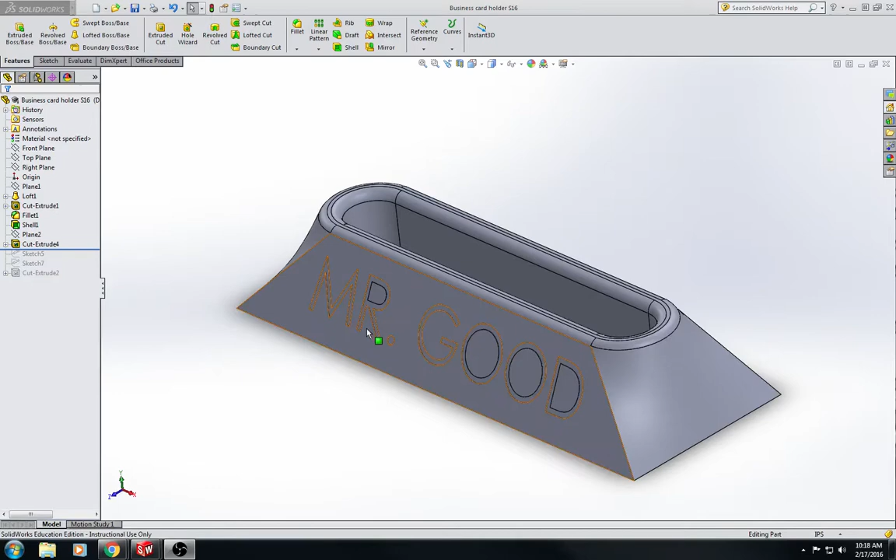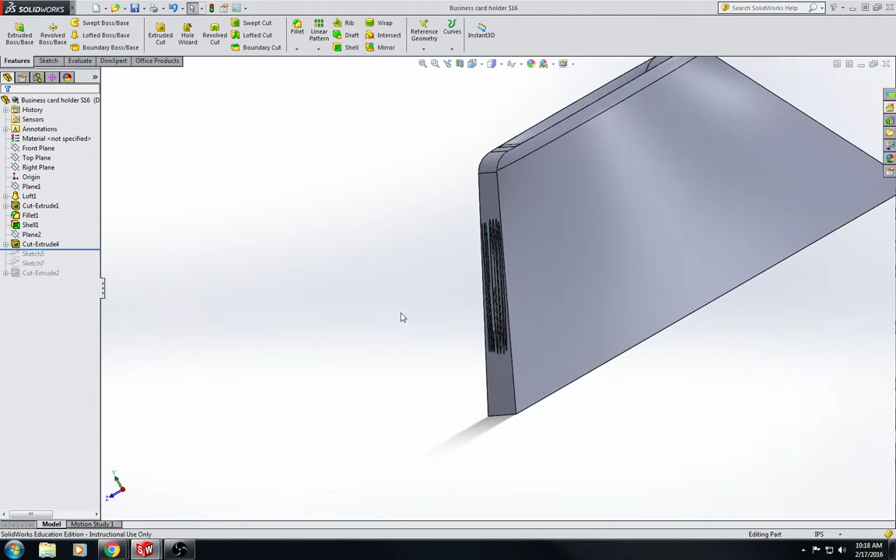It's extrude cut in just a 32nd of an inch, and we wouldn't want to extrude cut it in anymore because then it would start having some issues with adding some support material that we wouldn't want to be in there. So alright, let's go ahead and we'll get started.

So I'm going to go up to File, New, and we're going to make sure that we are in ANSI. So go ahead and go up to Options, Document Properties, make sure it says ANSI, not JIS or ISO. Click OK, and then also down here at the bottom we want to make sure that we're using IPS and not MMGS. So we want to be in inches, pounds, and seconds.

To get started on this business card holder, what we're going to do is we're going to draw a rectangle in the top plane, and we are going to then create a new plane, reference geometry, based off the top plane, about an inch up, and then we're going to draw a slot. So let's go ahead and get started on that.

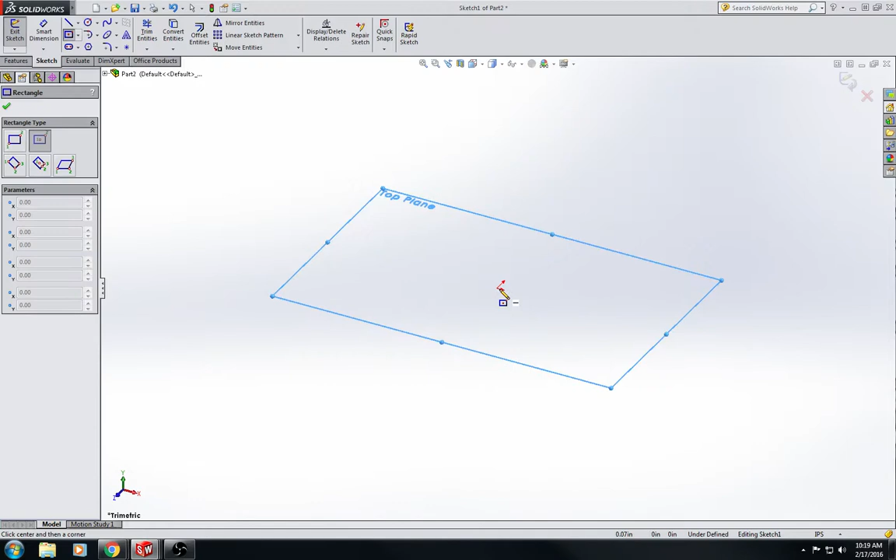So we'll go to Sketch tab, Center Rectangle, select the top plane, we'll draw out our rectangle, Smart Dimension, 3.5 and 2. Hit the purple arrow to exit the sketch. We're not going to attach a feature to the sketch yet, so there's no feature going on right now. I just exited the sketch.

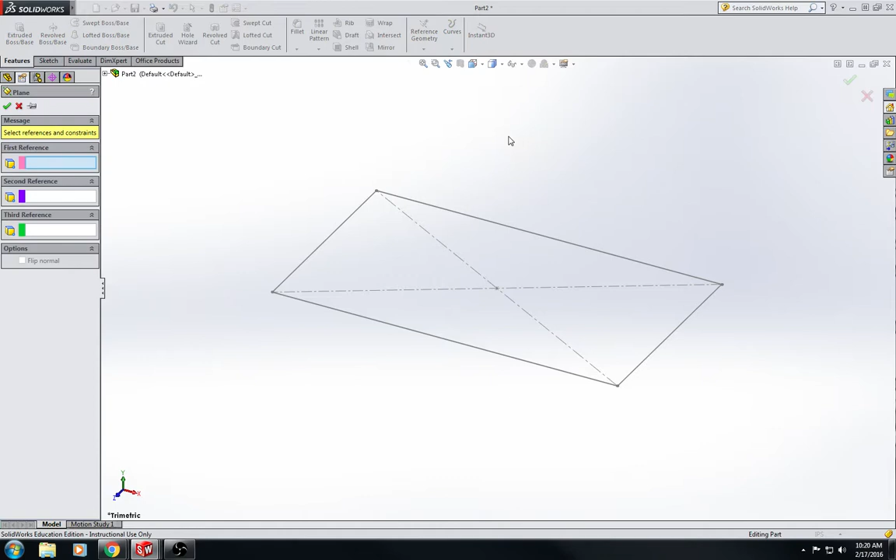Okay. Now I'm going to do another sketch, but I need to do this sketch on a reference plane which we haven't created yet. So we're going to go to Features tab, Reference Geometry, Plane, and for our first reference we're going to click this drop down and select the top plane. We want to offset that top plane 1 inch. Now you can see there's another plane on top of this top plane, offset 1 inch. We'll click the green check mark.

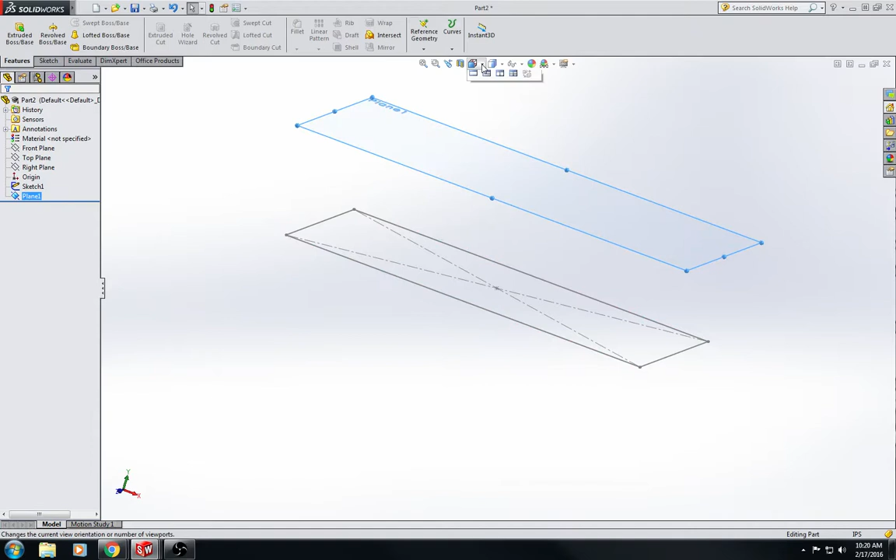Now a plane is infinite, so it doesn't matter how big or how small this is. A plane continues forever. So the size of the plane does not matter. You could actually even have the plane all the way over here, and you would still be drawing on the plane. Just to prove that point, I guess I'll just leave it over there. But it really wouldn't matter if it covered the whole thing or not.

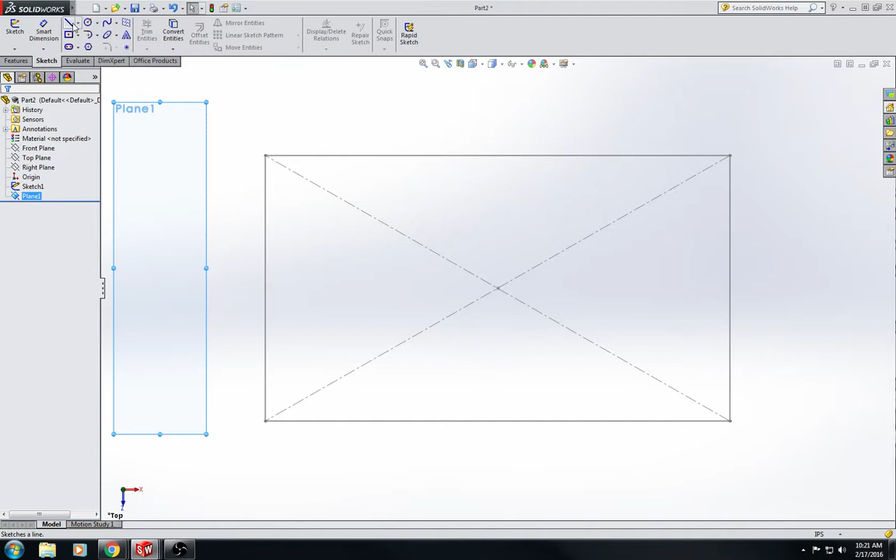So I'm going to go to Sketch tab, and I am going to use my line tool, and you need to make sure that plane 1 is selected before you select the line tool. Otherwise it's going to ask you what plane you want to draw on, and then you'll just select plane 1. But I already had it selected. Then I'm going to hold down the left mouse button, drag to the right, release the left mouse button. Going to move down, hold down the left mouse button, release the left mouse button.

I'm going to hit escape to exit the line tool. I'm going to hold down the shift key and select both lines. Now we want these lines to be equal, and the best way to do that is using the equal geometric relation. So I'm going to select that equal geometric relation, and we want to add one more geometric relation to these lines, and we want to have the endpoints be vertical from each other.

So as you can see, they're not necessarily vertical from each other. Even if you drew them so they appear vertical, they're not necessarily vertical. So by holding shift and selecting two of the endpoints that are supposed to be above each other and inserting a vertical relation, they now line up.

You don't need to do that to the other side because the lines are equal. So if the lines are equal and these two endpoints are on top of each other, then that means that these two must also be on top of each other. You can see that if I drag one, the other one follows along with it.

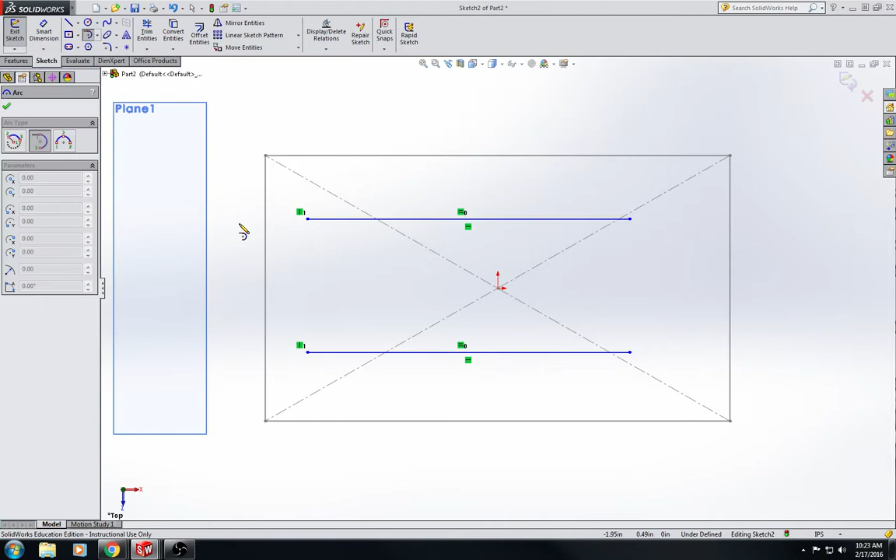Okay, now I'm going to do a tangent arc, and I'm going to select one endpoint and the endpoint below it. I am going to do the same thing over here, and if your arc is doing what mine is doing, just swing it around until it goes where you need it to go.

Then I'm going to do a center line from one corner to the other. And what I'm going to use this center line for is I'm going to snap the midpoint of this center line to the origin.

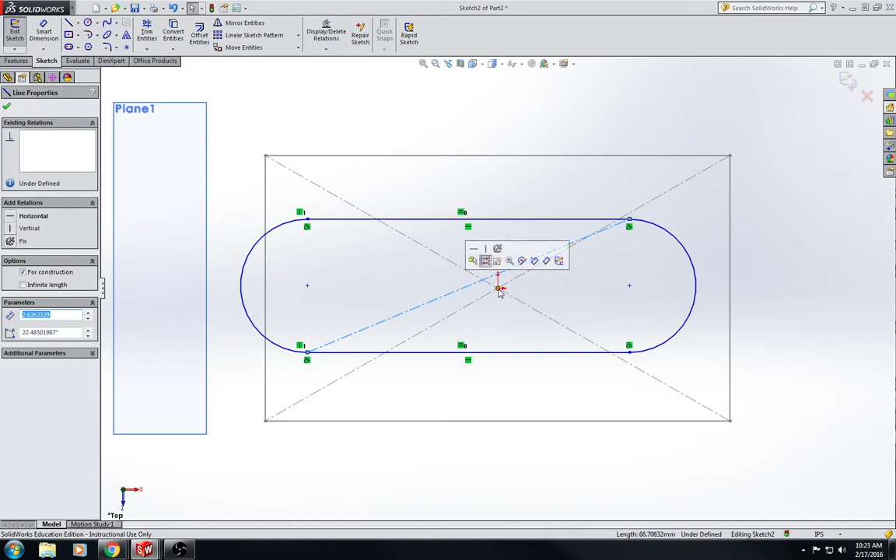Now, if for some reason you can't select the origin, you're probably not in the top view. So if you're slightly crooked, you see you can't select the origin. So you need to be perfectly in the top view, and then you'll be able to select the origin.

So I have this line selected. I'm going to hold shift, I'm going to select the origin, and I'm going to set a midpoint relation. And you'll see now that the origin is snapped directly halfway between both endpoints, right on our center line's midpoint.

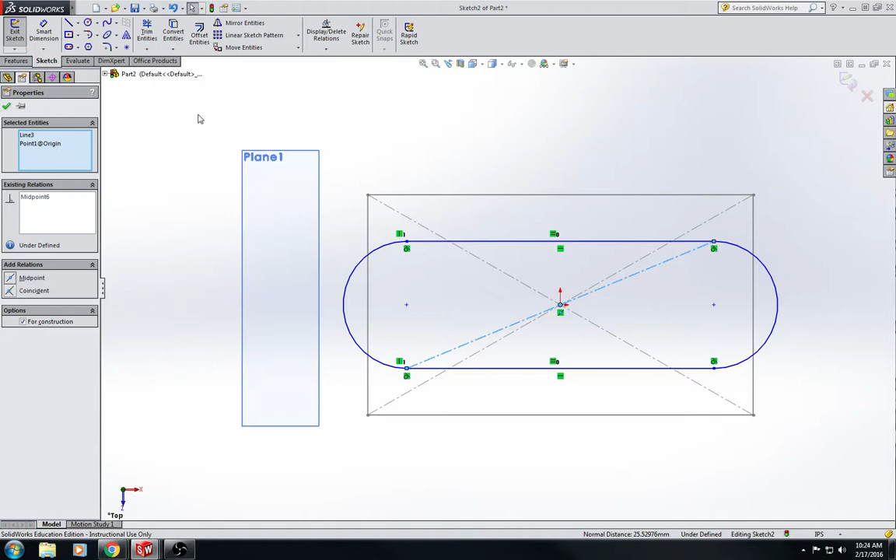I'm going to go to Smart Dimension, and I am going to set the distance between our top and bottom line to 1 inch. Going to select the top, and I'm going to set this to 3.5. And I think I must have messed up the sketch size here in this first one, so that's fine. We'll go back and change it.

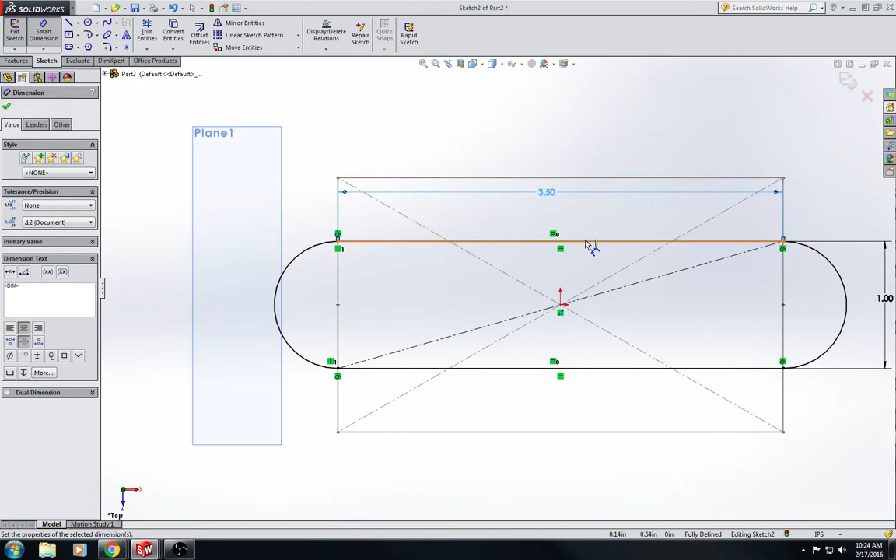Alright, so I'm going to go ahead and approve that sketch, but as you can see, this doesn't look quite right. I must have put in the wrong dimension here. So I'm going to go over to Sketch 1, right click, and I'm going to Edit Sketch. And this is supposed to be 5.5, not 3.5. There we go. Okay, now that looks good.

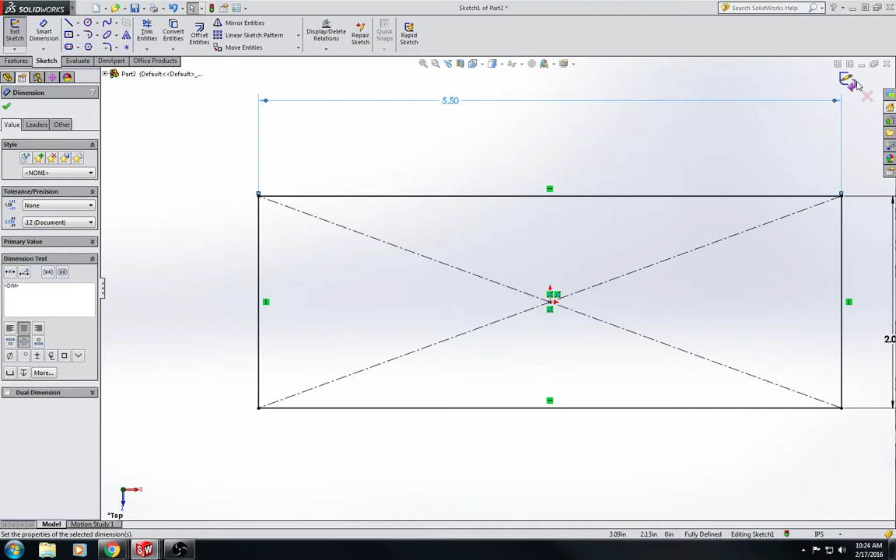Okay, now plane 1 is just in our way, so we don't want it anymore. We're just going to hide it. We're not deleting it, we're just hiding it so you can't see it. So just right click on it, select these glasses, and it'll disappear. It's still there, you just can't see it.

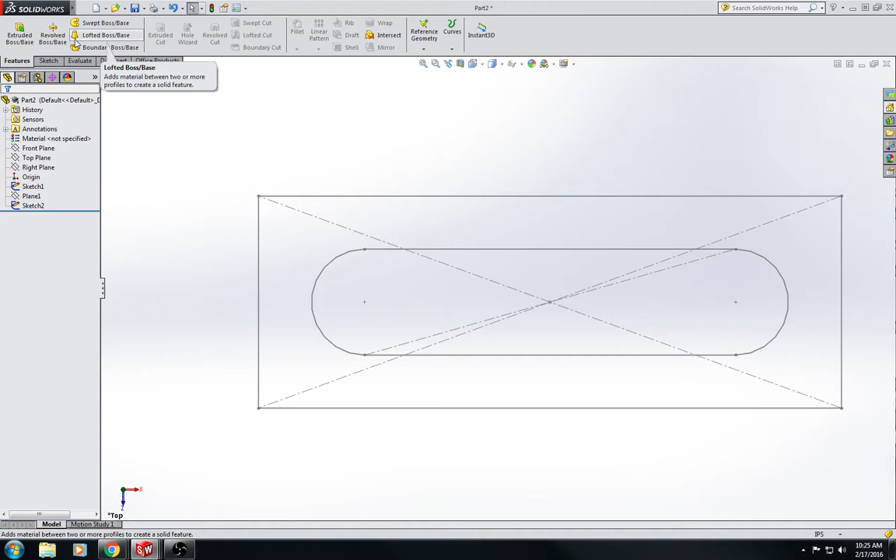The next thing we're going to do is we are going to use the feature Lofted Boss/Base. Now this is a new feature that you guys haven't used before. What the Lofted Boss/Base does, as you can see in the little diagram next to it, is it creates a solid part or a solid feature between two sketches. So I'm going to select that. It wants to know what my profiles are. So I'm going to click my drop down list, select sketch 1, select sketch 2.

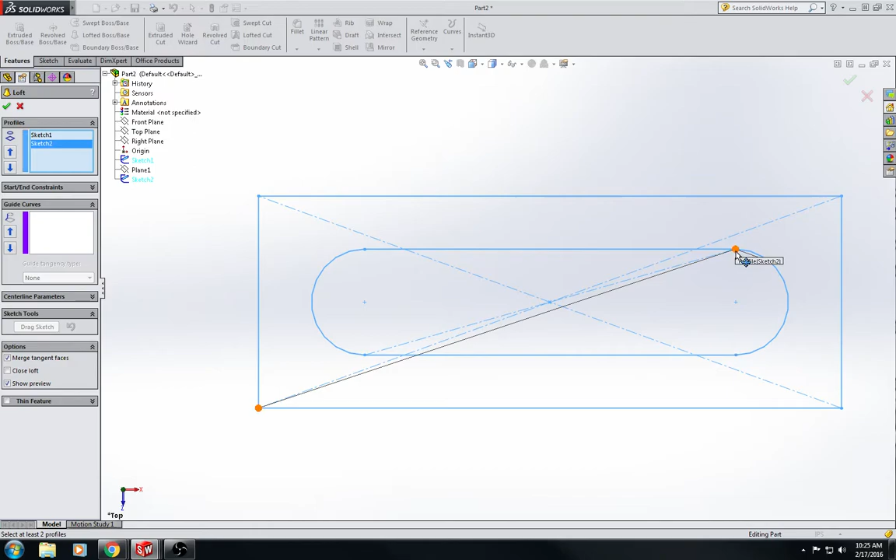And then you can see these dots here. These dots need to line up, and what I mean by that is they should be as close to each other as possible. Otherwise you might get some really funky looking shapes like that, and that's not going to work for us. So what we need to do is drag this other one to the other corner, and there we go. That is what we want.

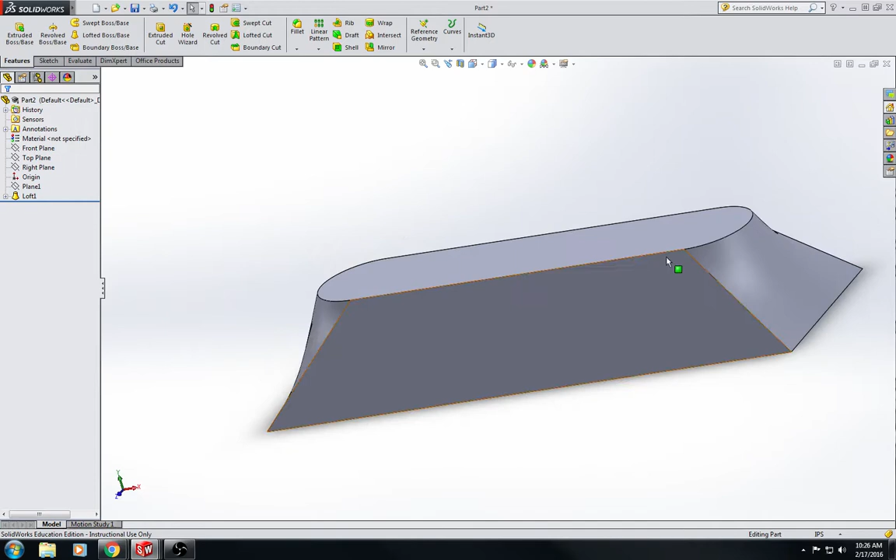Green check mark, and there's our loft. Sometimes if you're having trouble putting those dots where they need to go, change the angle that you're looking at the part, and then sometimes that'll allow you to put the dots or the grips where they need to go.

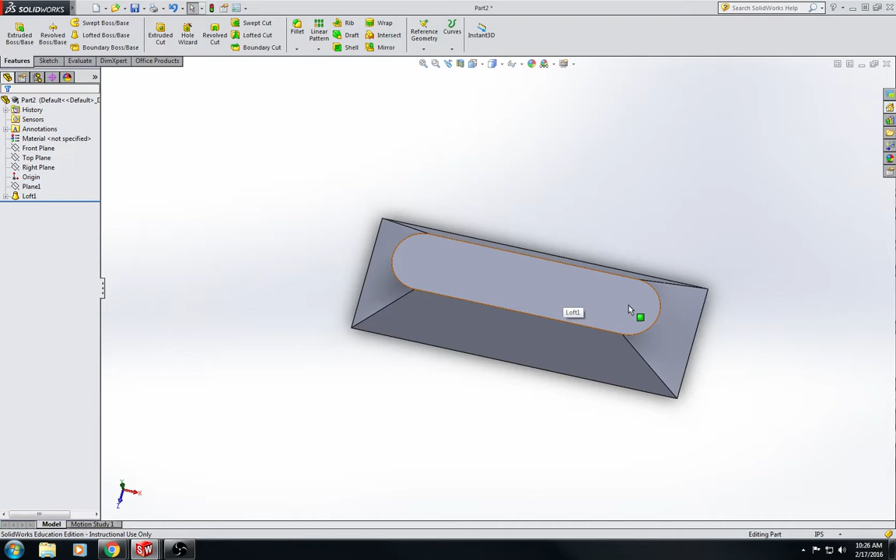Okay, so the next thing we're going to do is an extrude cut. This extrude cut is going to be right here, that's where the business cards will go. The extrude cut, we'll actually not have to draw it, we'll just offset this existing contour here.

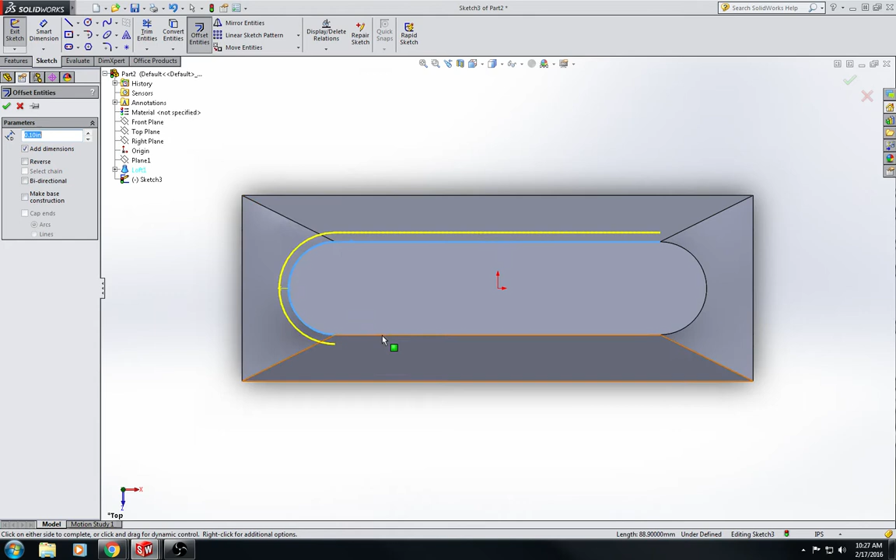So I'm going to go extruded cut. I'm going to select this top surface. I'm going to go to offset entities, and select these existing contours. Whoops. There we go. Okay, now I should have been able to do that in just one, but I accidentally clicked on the inside, which then set it to where it needs to be.

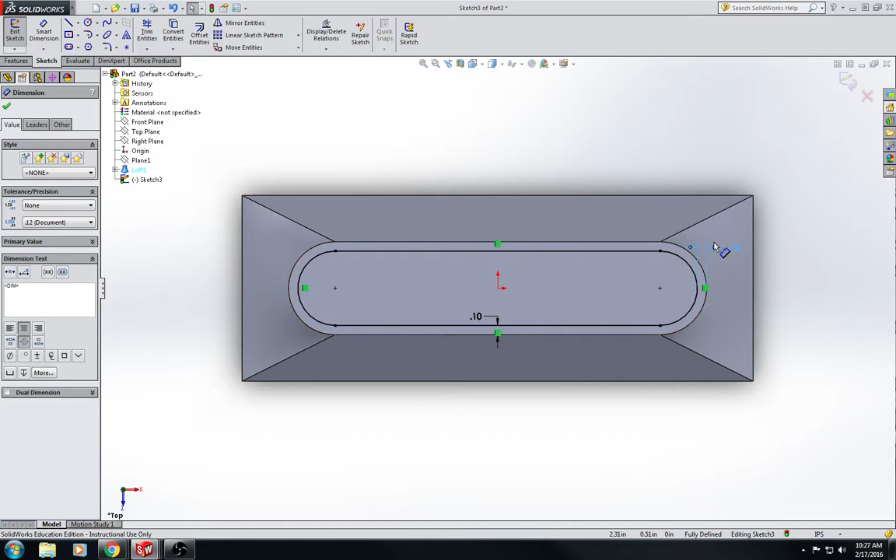We want these to be... I think it's 0.2, but let me make sure. I'm looking in the book here. Yeah, 0.2. So these should be 0.2.

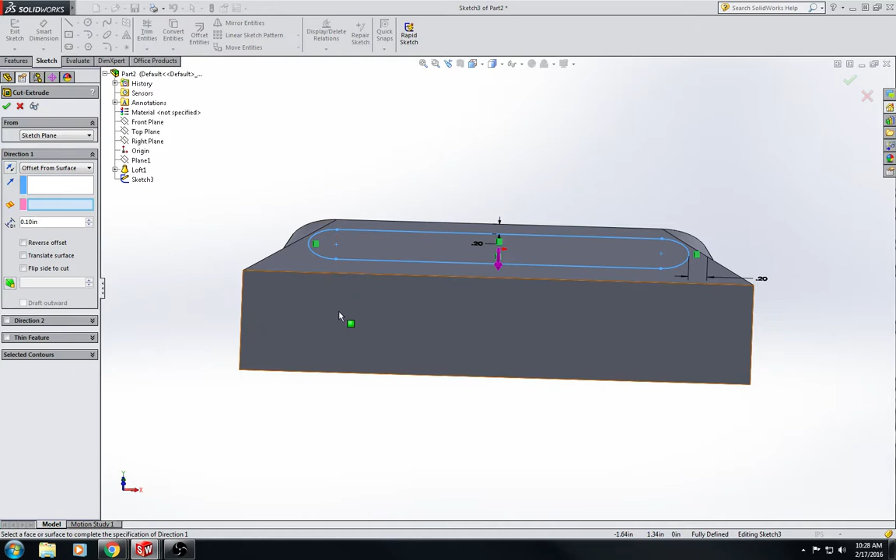Okay, there we go. Purple arrow, so we're fully defined, and we are going to extrude cut this all the way to the bottom almost. So we're going to do offset from surface. The surface we want to select, the face or plane, is this bottom one, and we are going to extrude cut that. This is different than what it says in the book.

We're going to put 0.06. Okay, and why we're doing it different than what the book says is because later we're going to go in and shell this out, and we're going to have this shelled out in the bottom, which means we're going to remove all this material in here.

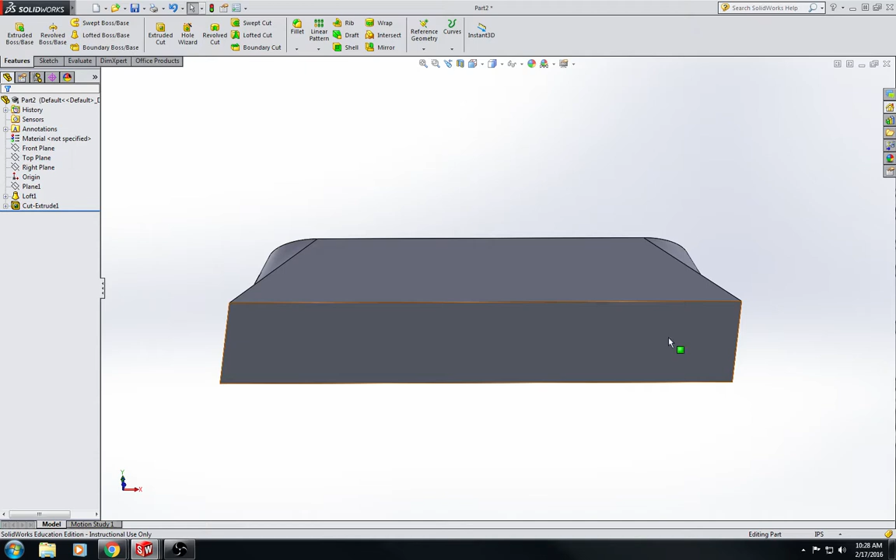But when we go to 3D print it, if we have it the way the book says, then the bottom of this is going to have support material on it. We don't necessarily want it to have support material on it, because if we set support material there, then it might potentially put support material in our name.

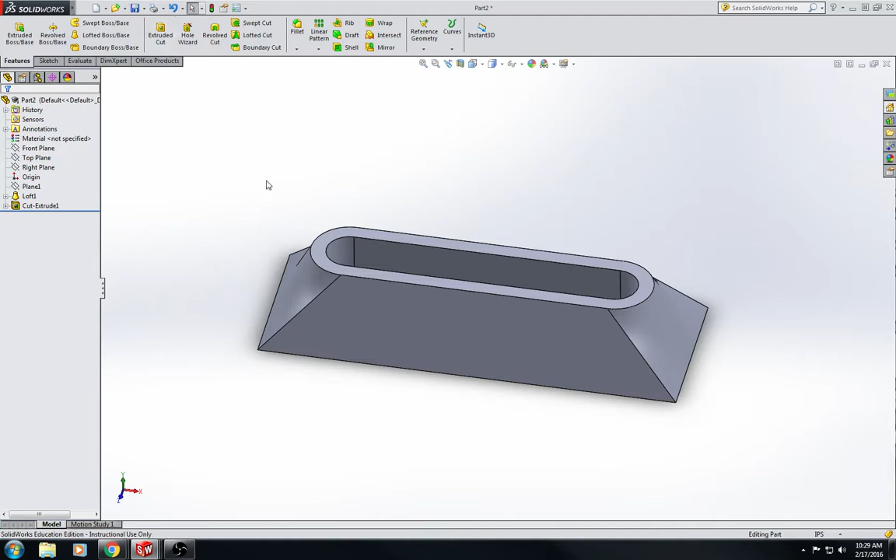So if we just drop this extrude down slightly deeper than what the book says, it'll make contact with the bottom of the build bed in the 3D printer, and that way it won't need support material, and we can avoid having support material in our name when we don't really need it, but it might put it in anyway. So the next thing we're going to do is we're going to add a fillet.

We're going to add this fillet, but the thing about this fillet is we're going to end up having to sort of go back and change the order of where we put it in here, but we're doing this for a purpose, so that we can shell it out. So that's what the fillet's going to look like there.

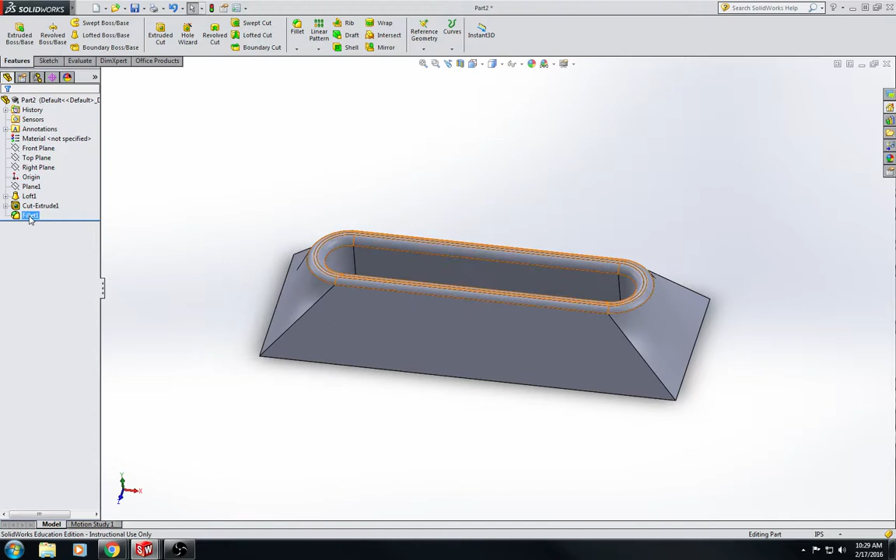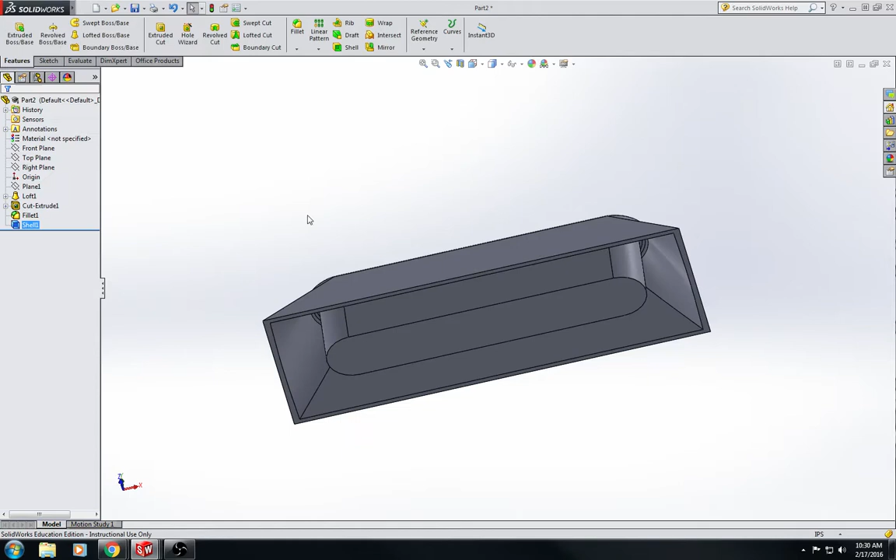So what we're going to do is we're going to do a shell. There it is, shell. I'm going to select this bottom face, and we're going to set our parameters to 0.06. So that's going to set the thickness of our shell to 0.06. Okay, so you can see on the inside there what that shell does to our part.

Now I'm going to do a section view here so you guys can see what this looks like. Now you can see, since we had this filleted already, it shelled to the fillet. Okay, so we would have a nice rounded curve there.

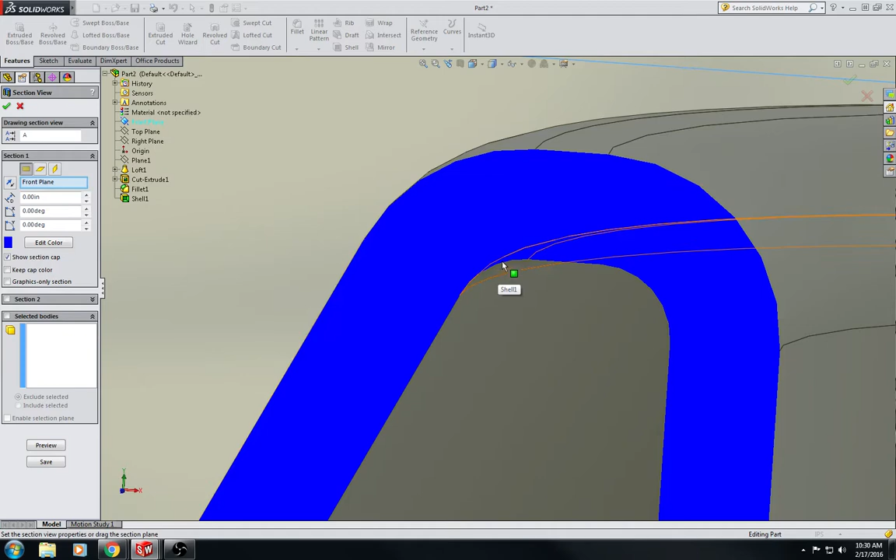However, if we did the shell first and then we did the fillet, so if we reorder these, then you'll see what happens is, so this is saying okay, we shelled it, and now we're going to do the fillet up here. Well, what happens is it fillets the outside, but it doesn't fillet the inside. So then you have a weak point here where it could potentially snap easily.

So what we want is to do it in the order that we did it, but I'm just illustrating for you what would happen if you did it backwards, if you did the shell first. And it is also, I wanted to show you guys how you can reorder certain features.

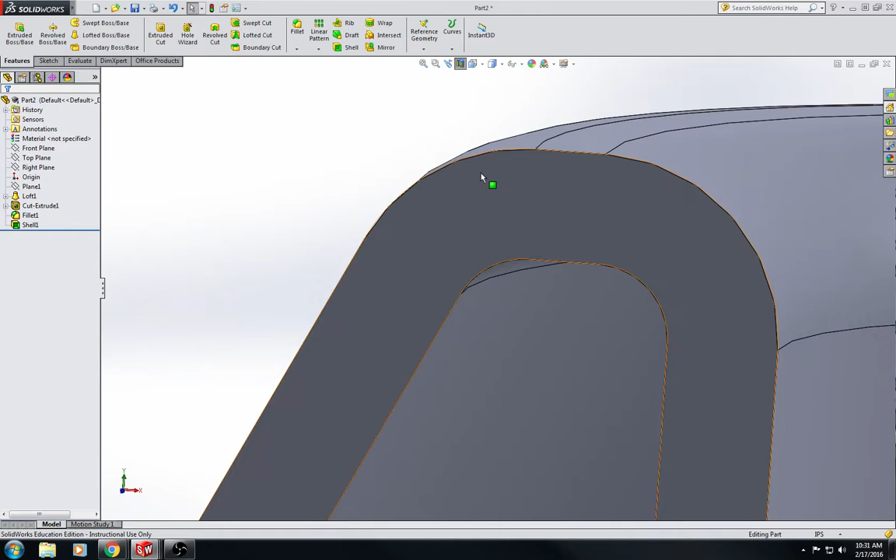And now I just reordered that fillet to occur before that shell so that you guys can see that now the shell includes that fillet, so we have that constant 0.06, whereas before, if we were to do the shell first, we wouldn't have that constant 0.06, it would be something else.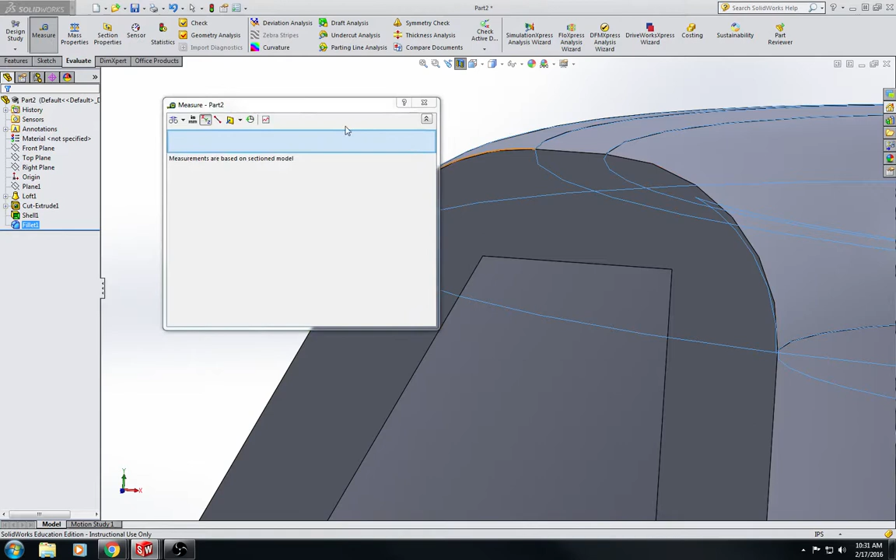And just for the heck of it, let's just see what that measurement would be. It would be... well, it's showing me in inches.

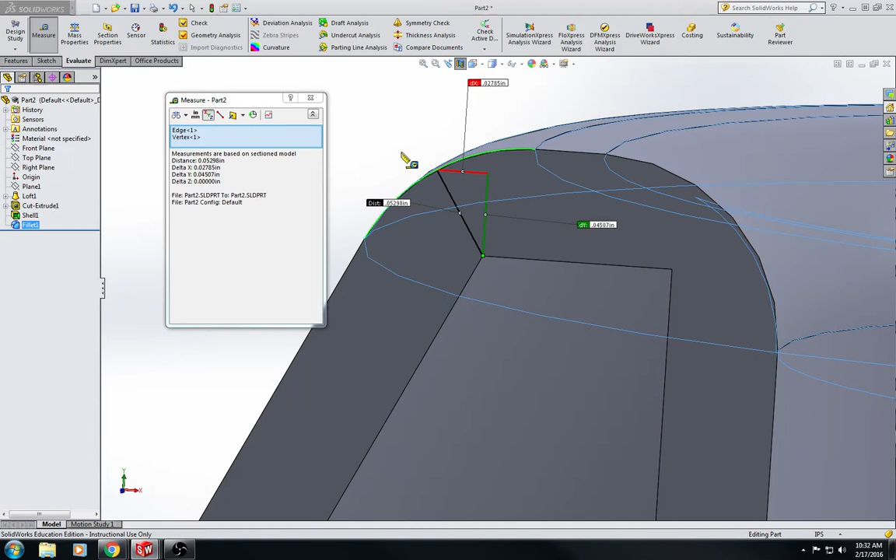It's 0.003 off, 3 thousandths different. Not a big deal, but we would like it to be right. So I'm just going to reorder that so now it's correct, and we can measure it again just so you guys can see that it is going to be 0.06.

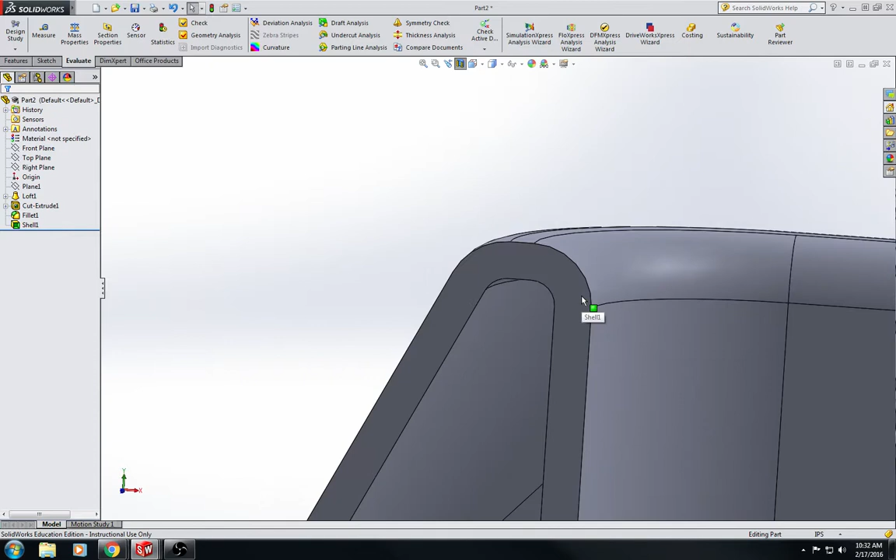Next what we can do is exit my section view. Okay, so here's our business card holder.

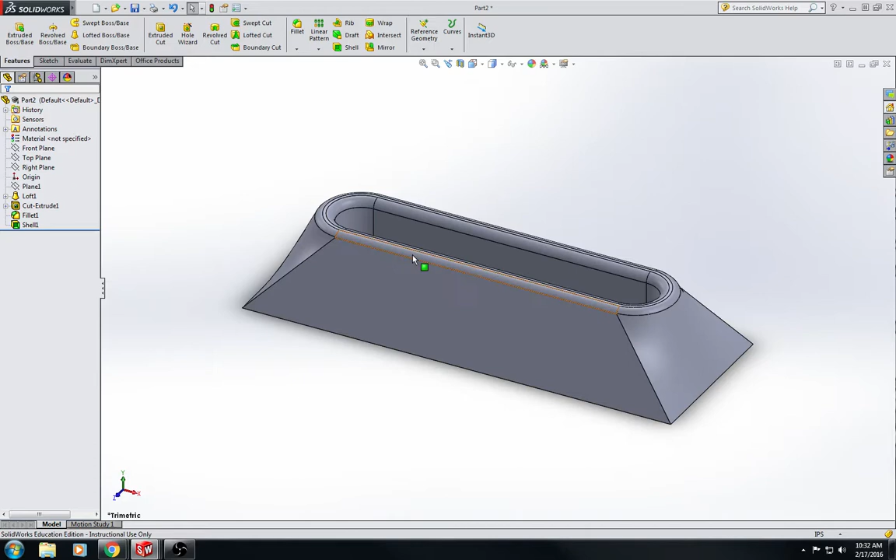It's looking pretty good, but it would look even cooler if it had your name on it. So what we're going to do is create a reference plane off the front view, or the front plane. It doesn't matter how far out this plane is, as long as it's off the part. It could be a million miles away, or it could be like a tenth of an inch off the part. It doesn't really matter, as long as your new plane is based off the front plane as its first reference, and it's off of the part. We wouldn't want the plane on the part.

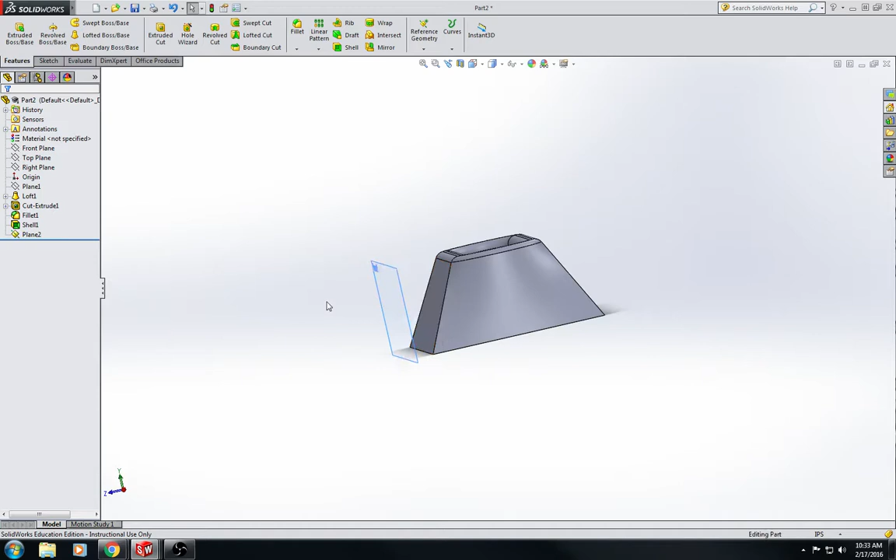The reason why is because then we might not be able to get our entire name on there. It might cut off the bottom of it.

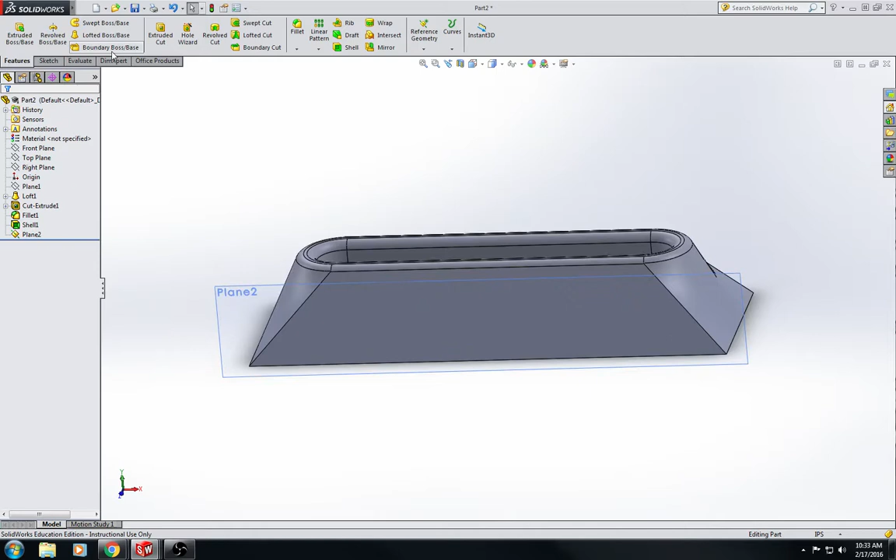So what we're going to do is extrude cut our name into this part. The reason we need this plane is because if you do an extrude cut and try to select this face and draw a line on it, you can get that line there, but the way it's going to cut in is at an angle following this face, and we want it to cut in nice and straight. We don't want to cut in at an angle on that face. We want our words to go in perfectly straight.

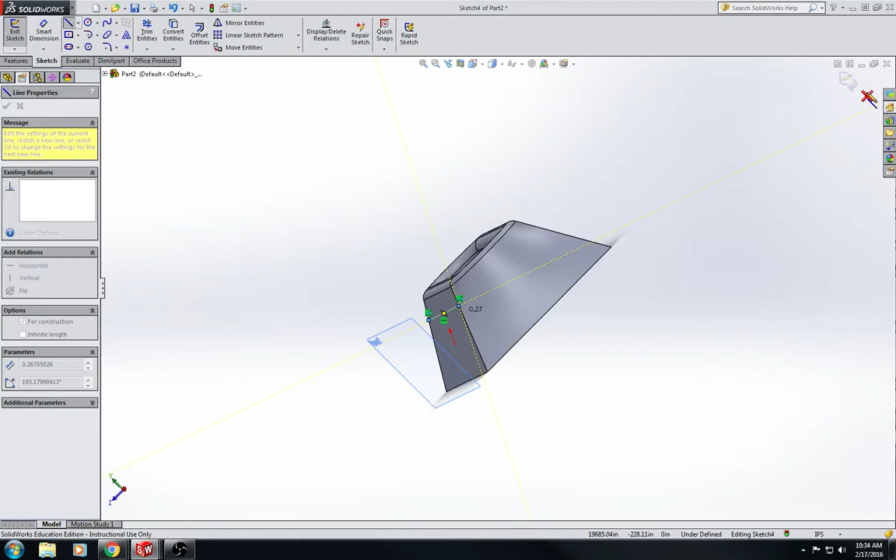So we're going to use this plane we just created. We'll change to our front view, sketch, features tab, extrude cut, select plane 2, sketch tab, offset entities, and we will set this parameter to a quarter inch, and we're going to offset this bottom edge up.

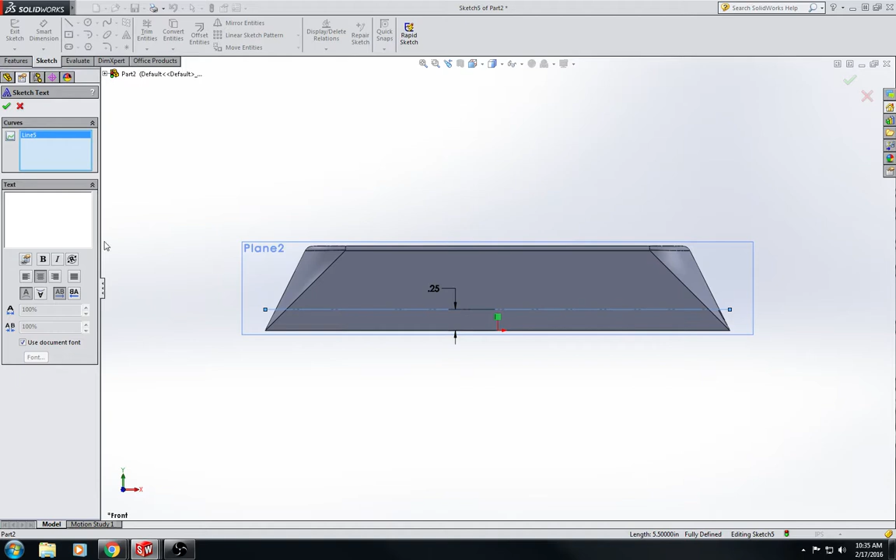We are going to select it and set it for construction. We're going to use this as a guideline for where our name is going to go. So I'm going to select this text tool, and where it says curves, I'm going to make sure it's blue. Then I'm going to select that line. Now anything we type is going to be on that line.

Okay, so I'm going to put in my name, Mr. Good, all caps. Caps will be better. Then if yours is to the left, you can center it by clicking this button. If yours is upside down, you can flip it right side up. If it is backwards, you can flip it so that it's the correct direction.

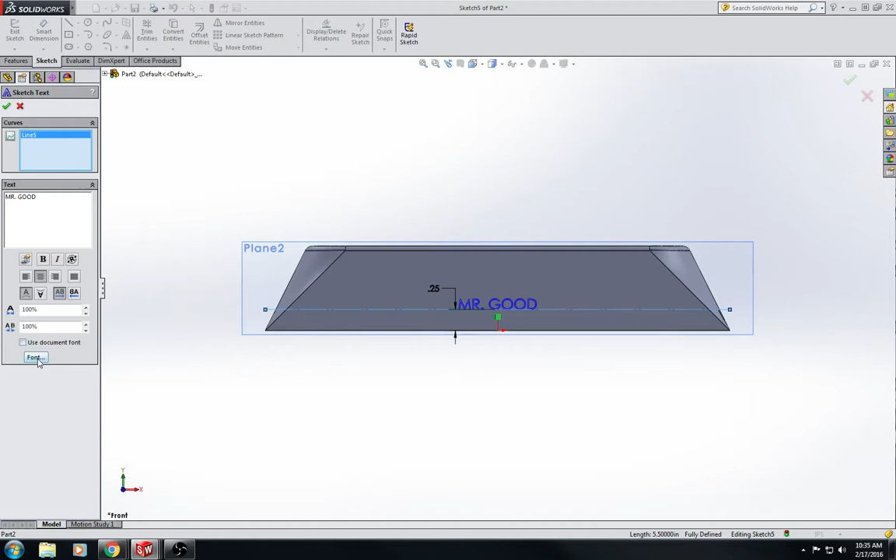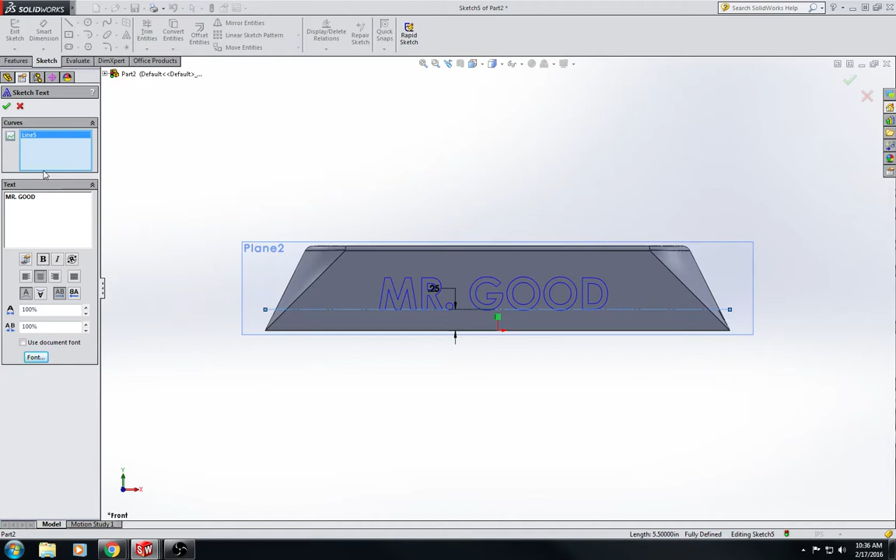We do want this to be bigger, so we'll use document font, go to font, and change the units so that our name is 3/8 of an inch big. If that's going to make your name too big, you can go with 1/4 inch instead, that'll be fine as well. I'm also going to make it bold. Green check mark. Okay, so there's our name.

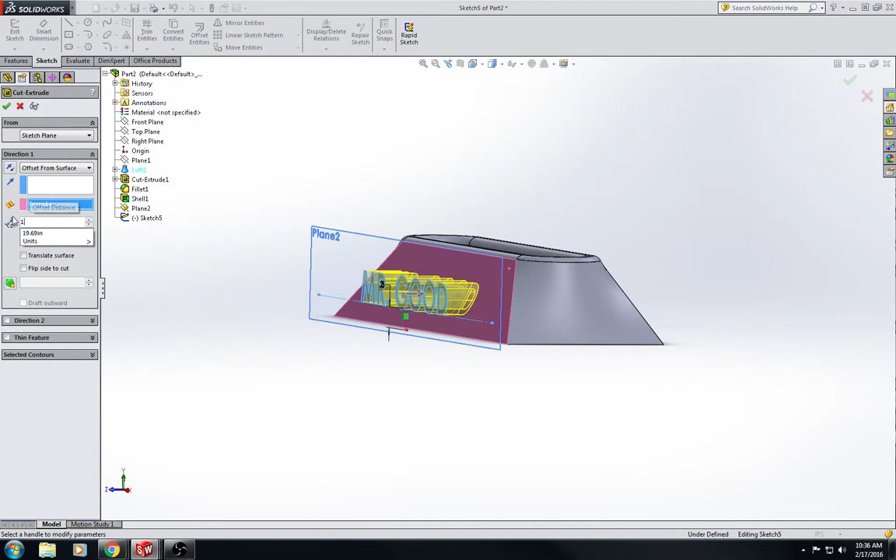What we're going to do now is extrude cut that name into the surface here. So we're going to do an offset from surface. Right here for our face plane, we want to select the face. We want this depth to be 1/32 of an inch. That way the 3D printer shouldn't have any problems without needing support material.

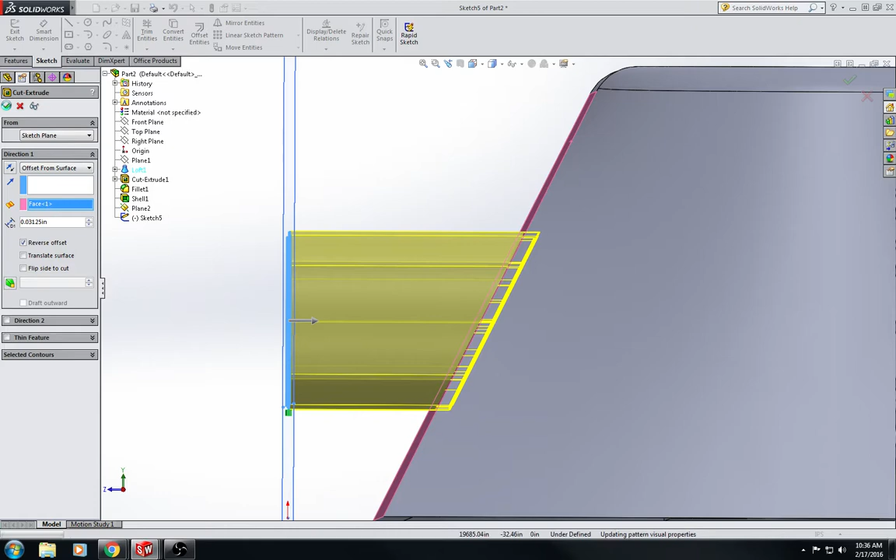You can see it's not extrude cutting into the part, so if you get to this point and hit the green check mark, you're going to get an error that says the intended cut does not intersect the model. So what we have to do then is reverse the offset, and now you'll see that it extrude cuts into that surface. Hit the green check mark. Sometimes it takes a while because this is a lot of math for SolidWorks to do.

And there's your name. My name. There's my name. Alright.

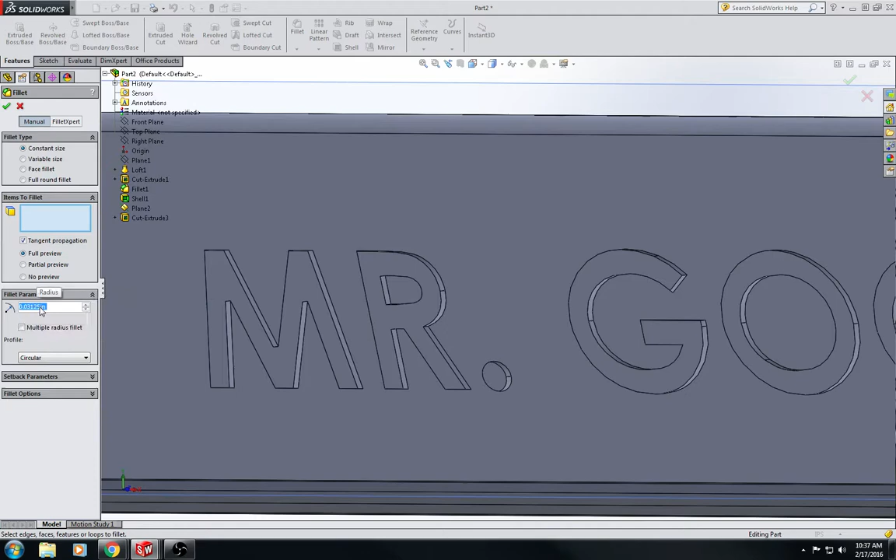I just want to see what this does here. I haven't tried this, but I just had an idea. This might make it easier for the 3D printer to print. I'm not sure, I just want to see what this looks like.

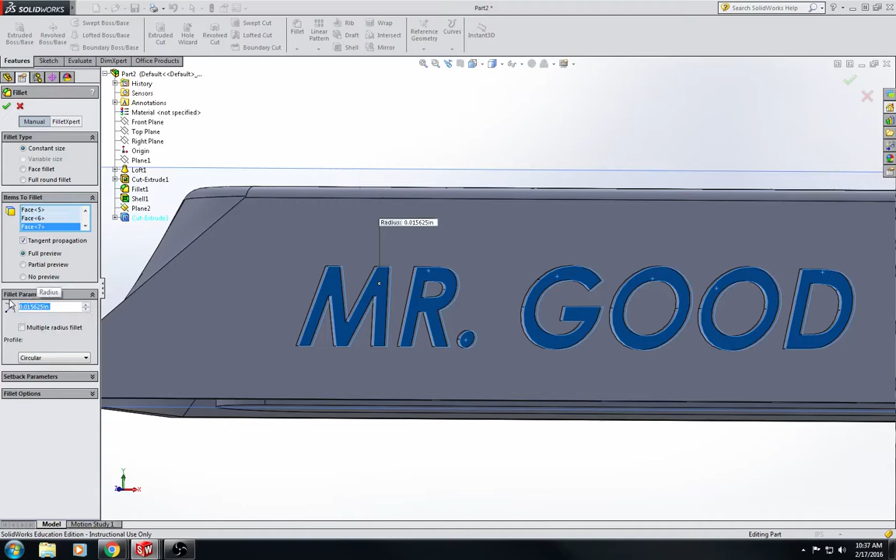So this might just be a little bit too big. We'll change that to a 64th of an inch. Let's see what it does. Okay, so it was able to do a 64th of an inch.

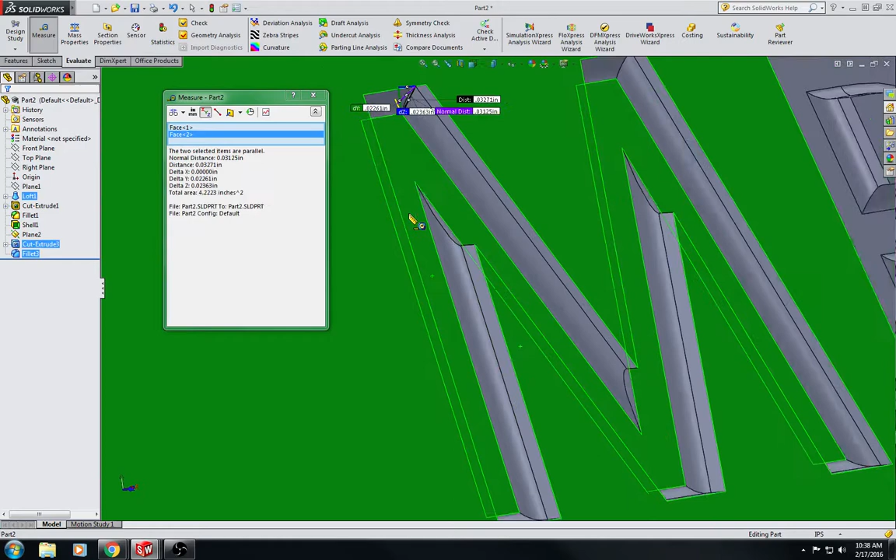Curious to see if that changes our depth or not. Yeah, okay, so it's still a 32nd of an inch.

Oh wait, no, I want to look at this purple line here. Whoops, where'd it go?

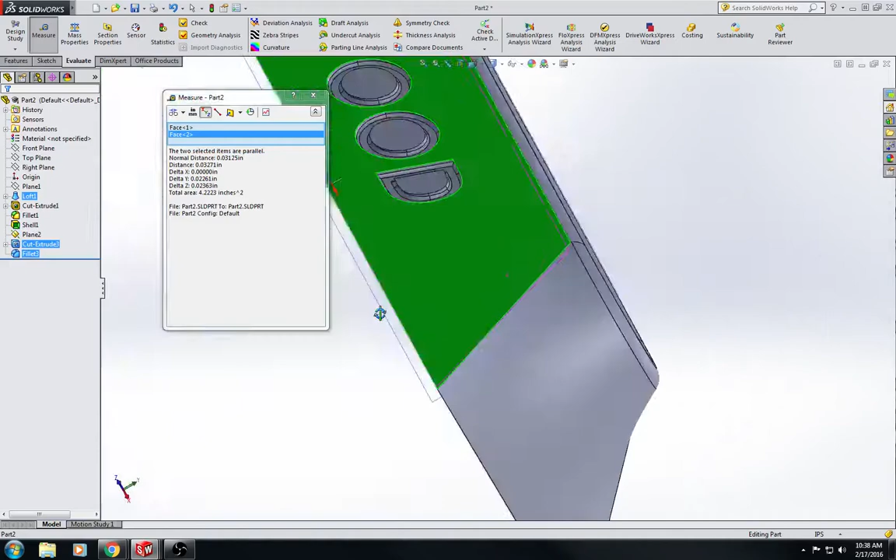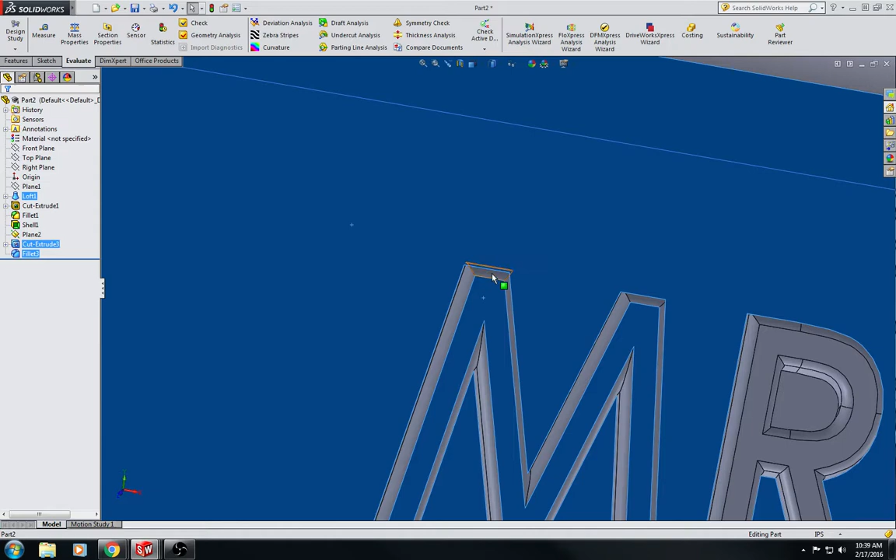Okay, yeah, so it's still a 32nd of an inch. So yeah, I think that's a good idea. That should make it slightly easier for the 3D printer to print, so that way it doesn't necessarily have so much of an overhang. Now, I'm not entirely convinced that a 64th of an inch is actually going to do anything, but it wouldn't hurt. So it may or may not do anything.

Okay, so there is our name, my name. The bottom is shelled out like it should be. Okay, so that's good. Let's change this transparency to make this see-through.

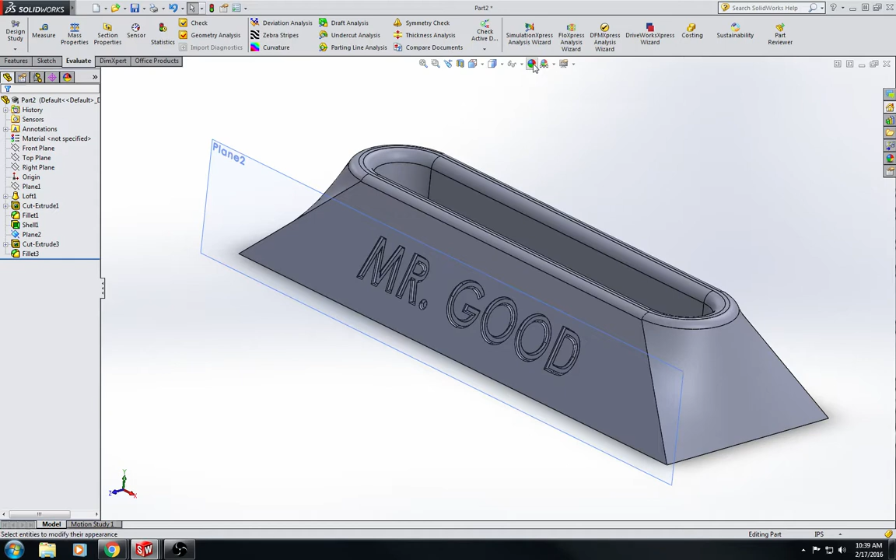So if we were going to make it out of something like acrylic, we could do that, acrylic, and it would be clear or transparent.

To make this transparent, I don't remember exactly how to do it. It's slightly different from the way I learned how to do this in an older version of SolidWorks. They sort of changed it on me, so I don't remember exactly how to do this. There it is, it's in Illumination.

Okay, so if you click on the Illumination tab in the Advanced settings, you can change the transparency amount. Let's change this transparency amount to, I don't know, what do you think, like 50%? Let's just see what that does.

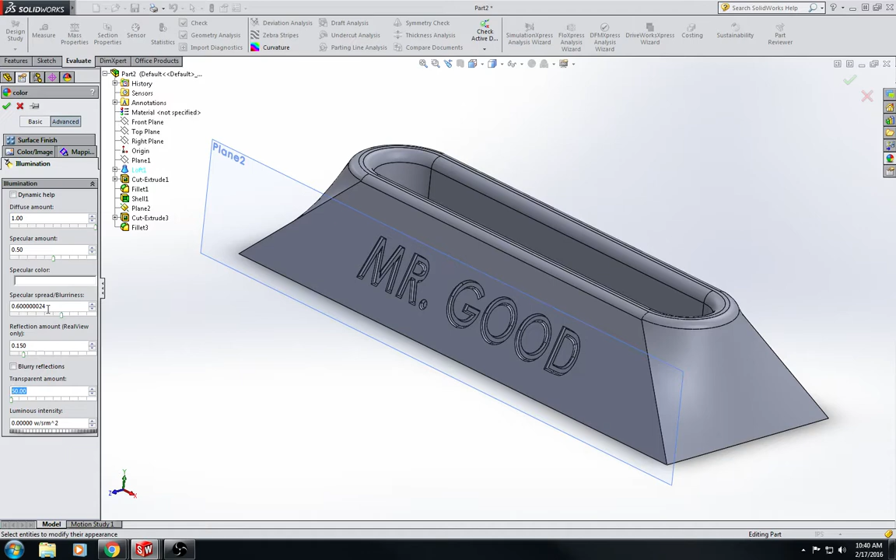That's a little too transparent. It's gone. Ah, where'd it go? Alright, let's change that. We'll do... okay, well, that's why.

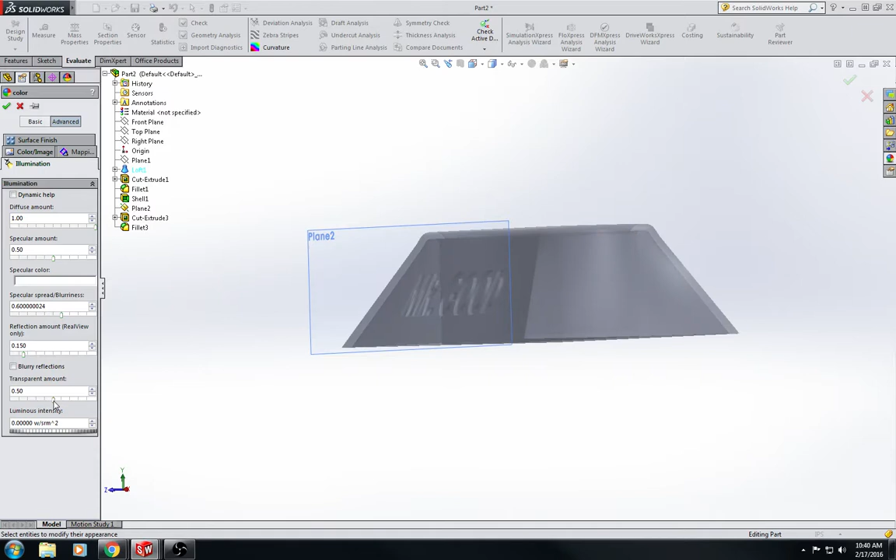Alright, so yeah, there. Okay, so if we were going to make this out of like some acrylic, it would be sort of transparent, or it would be transparent. You'd be able to see through it like that, and that looks kind of cool.

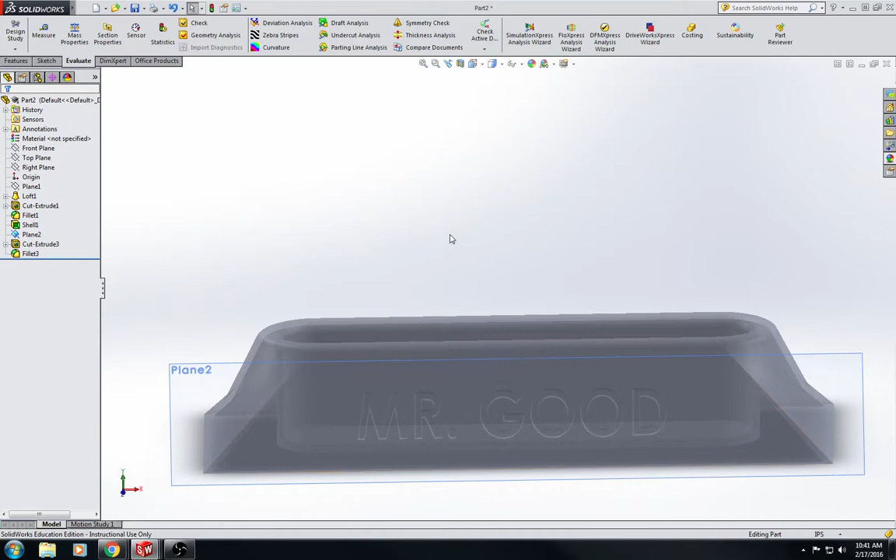And then that way you'd be able to see the rest of the business card, or at least be able to have the idea of what the rest of the business card would look like on the inside of the business card holder. Alright, so let's go ahead and we'll set a material type to edit material.

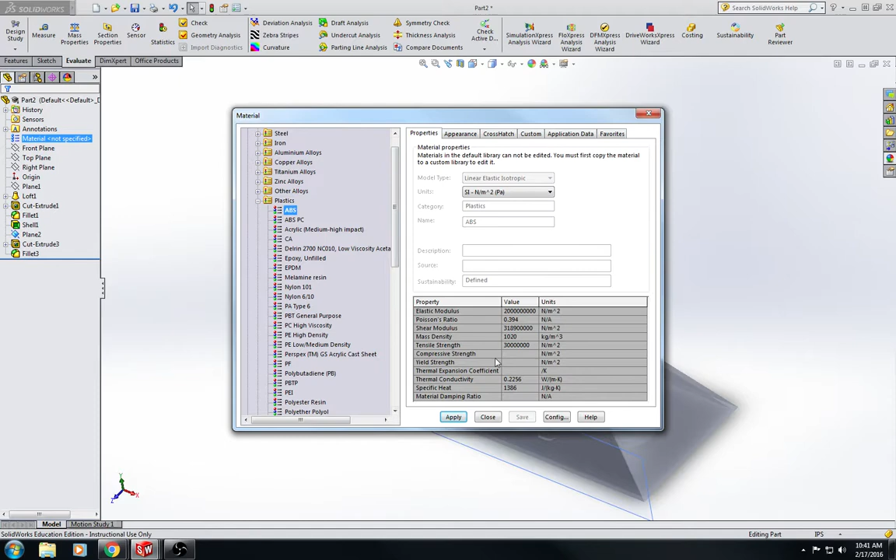And we'll go to plastics, and let's select... see if they have PLA. Okay, I'm not seeing PLA specifically, but they have some other variations of it. But let's just select ABS, apply and close, and so there's our business card holder.

Alright, cool. So I'm just going to hide that plane just because we don't need it, and let's just, for the heck of it, see how much this thing's going to weigh.

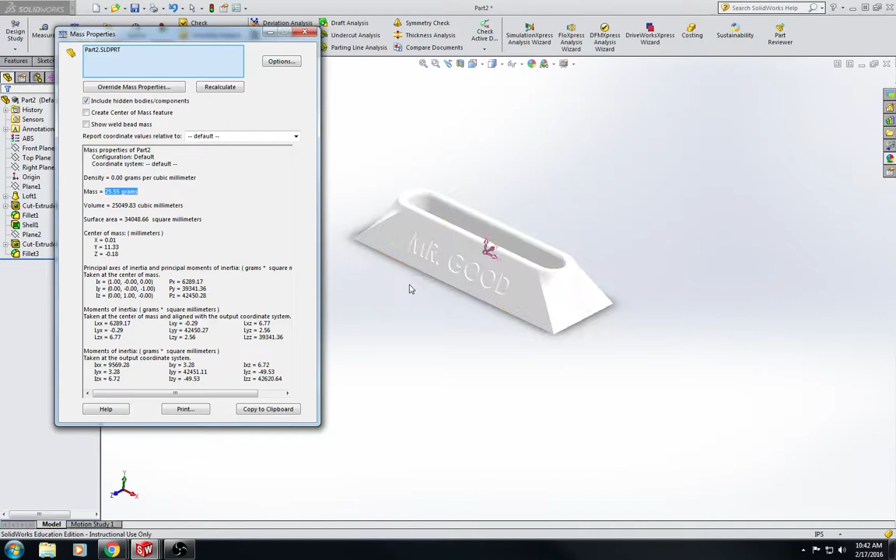So I'm up in the Evaluate tab. I selected mass properties, and the mass should be approximately 25.55 grams, depending on how big your name is or how much you removed for your name, but it should all be pretty darn close.

Alright, so we'll go ahead and we'll save this, and we'll also save it as a .stl file. I'm trying to save it over the business card holder that I showed you in the beginning of the video.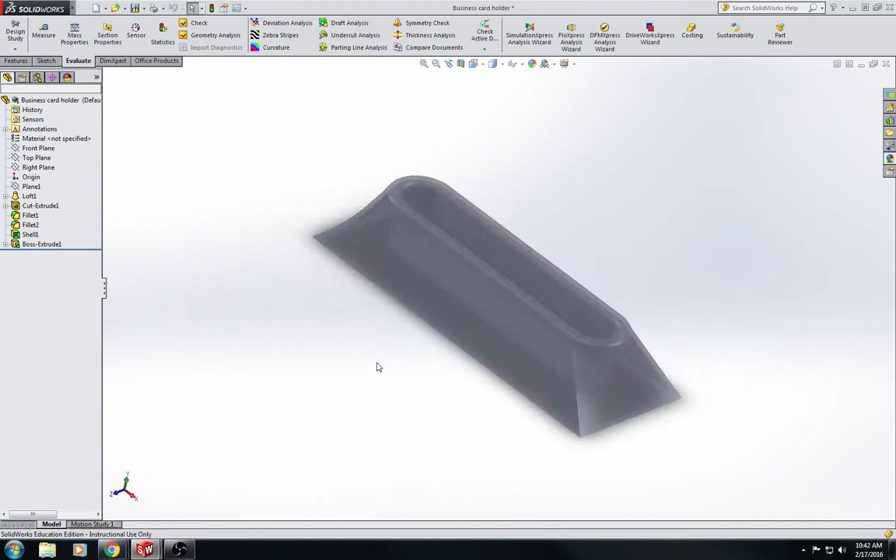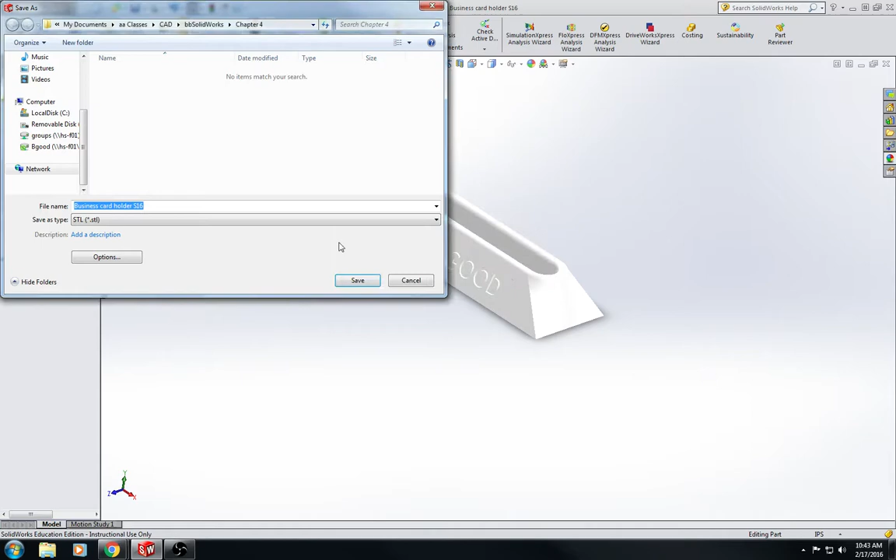Okay, and then I'm also going to go to File, Save As, and this time I'm going to save it as a .stl. And there's our triangulated geometry. Cool, so this is ready to get put into the Cube Pro software to be 3D printed.